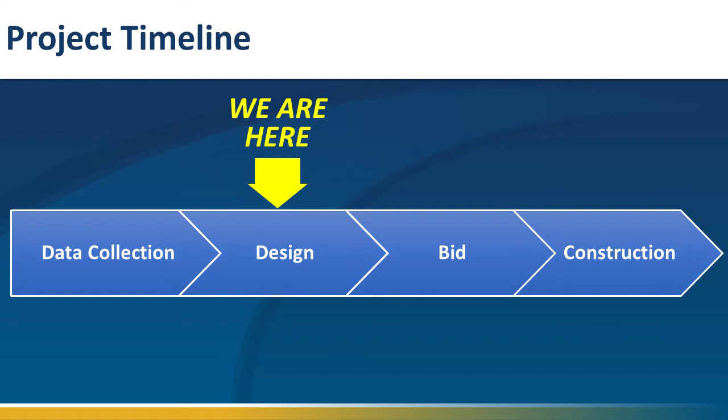Construction is anticipated to begin in March 2021 and is anticipated to be complete in June 2023. Traffic control plans will be developed to protect traffic and mitigate the impact during the construction period. There may be short-term, temporary delays and congestion, but every effort will be made to reduce delays during construction.

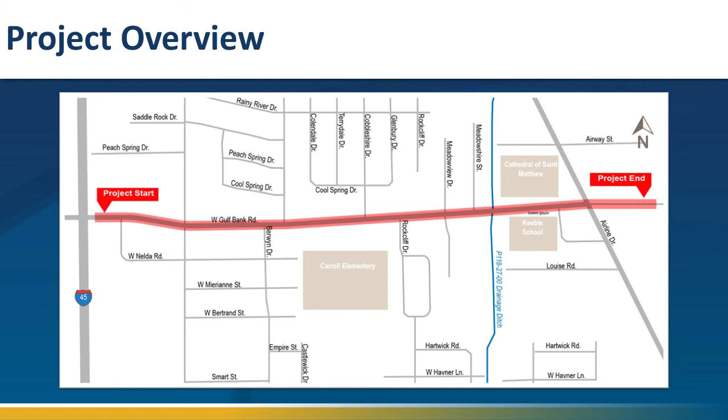West Gulf Bank Road is classified as a major thoroughfare with 4 lanes in the City of Houston's Major Thoroughfare and Freeway Plan. However, it currently exists as an undivided 2-lane asphalt road that does not have sufficient capacity to serve travel demand. The roadway currently does not provide pedestrian or bike facilities, and residents are forced to walk along the existing drainage ditches or in the roadway.

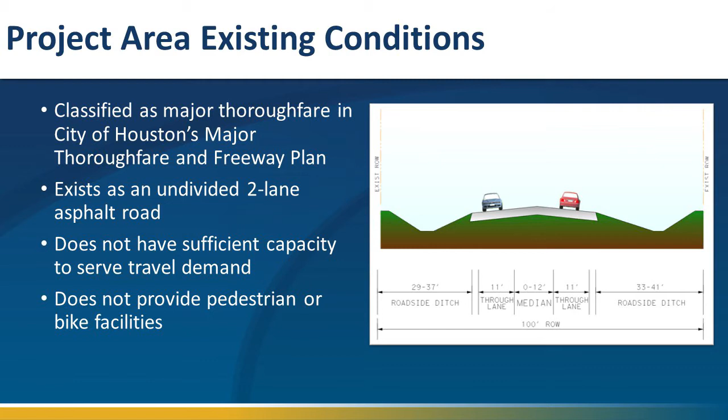In response to public concerns regarding increased traffic congestion and inadequate pedestrian facilities in the area, the Harris County Engineering Department is proposing these improvements to achieve a level of service to meet current and future traffic volumes, reduce delays, provide safe mobility for pedestrians and bicyclists, and reduce structural flooding of residences and businesses within the project area.

Another goal of the proposed project is to support the revitalization of the underserved communities surrounding West Gulf Bank Road by providing new public infrastructure, access to affordable and comfortable modes of transportation, and safe access to schools, churches, and businesses. By providing new public infrastructure, access to affordable and comfortable modes of transportation, and safe access to community facilities, the proposed project supports the revitalization of the communities along West Gulf Bank Road.

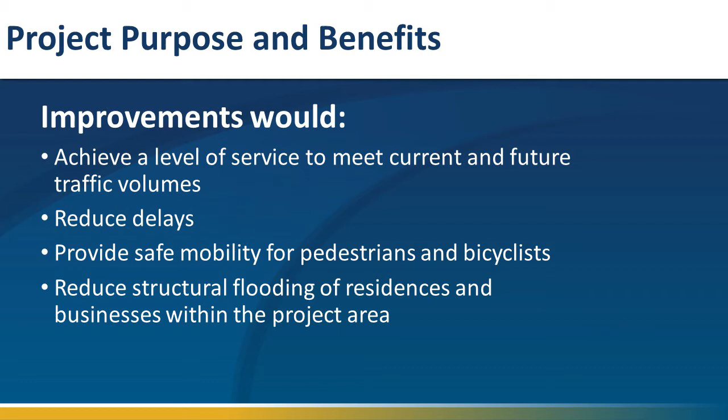The proposed improvements consist of reconstructing West Gulf Bank Road from a 2-lane undivided roadway to a 4-lane divided boulevard, with modernized traffic signals at Sweetwater Lane and Airline Drive and a new signalized intersection at Cobbleshire Drive. A closed drainage system with underground storm sewers will replace the existing roadside ditches.

An additional lane in each direction will increase traffic capacity on West Gulf Bank Road and provide stable flow of vehicles during peak hour traffic. Vehicles would also be able to more efficiently access Interstate Highway 45, which is both a designated evacuation route and freight corridor. The addition of medians, strategic median openings, and exclusive turning lanes will reduce traffic congestion on West Gulf Bank Road.

The Texas Department of Transportation previously acquired the necessary right-of-way to construct the proposed improvements. However, small strips of right-of-way will still need to be acquired at several intersections to achieve adequate and safe sight distances.

Construction costs for the proposed improvements are estimated to be $14.2 million.

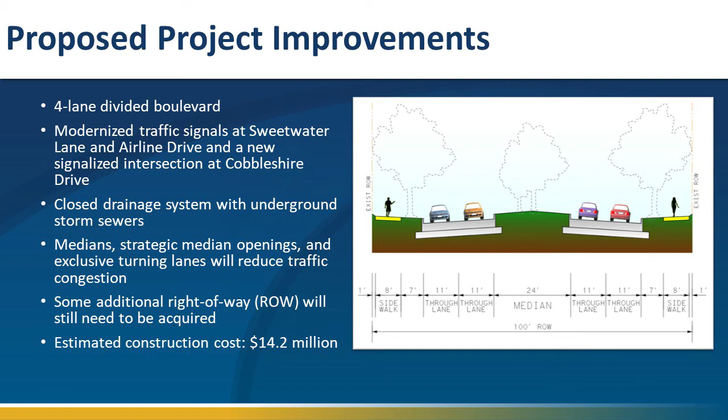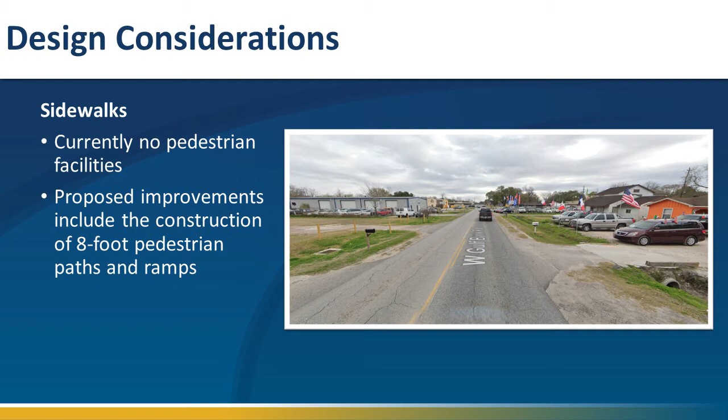The Harris County Engineering Department considered several factors when developing designs and upgrades to provide equitable access for road users, including bicyclists and pedestrians. These considerations included sidewalks. As West Gulf Bank Road currently provides no pedestrian or bike facilities, proposed improvements also include the construction of 8-foot sidewalks and ramps along each side of the corridor to limit conflict points and provide safe access to schools, churches, parks, and businesses in the project area.

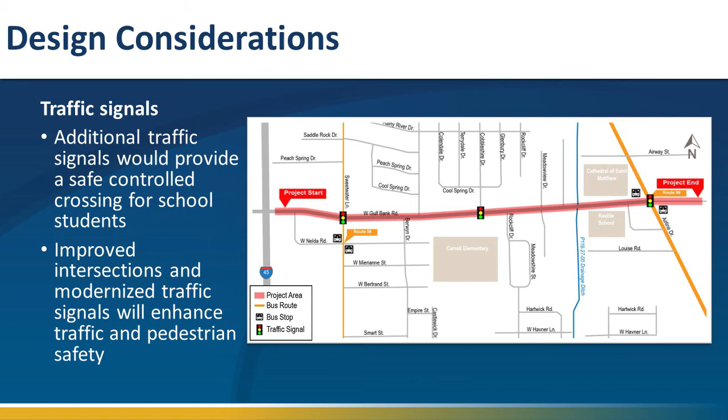Traffic signals: due to the spacing between existing signals at the intersection of Sweetwater Lane to the west and Airline Drive to the east, traffic signal installation is warranted at the intersection of West Gulf Bank Road at Cobbleshire Drive. A traffic signal at this location would provide a safe, controlled crossing for students that live on the north side of West Gulf Bank Road. Improved intersections and modernized traffic signals at Sweetwater Lane and Airline Drive will also enhance traffic and pedestrian safety.

Drainage: using recently updated rainfall data and probabilities, a hydrology and hydraulics impact analysis was completed to determine the required drainage system to mitigate the increases in stormwater runoff. The proposed drainage improvements will include a system of underground box sewers and minor regrading along channel P118-27-00 east of Meadowshire. The underground storm system will replace the existing shallow roadside ditches to provide drainage conveyance and detention.

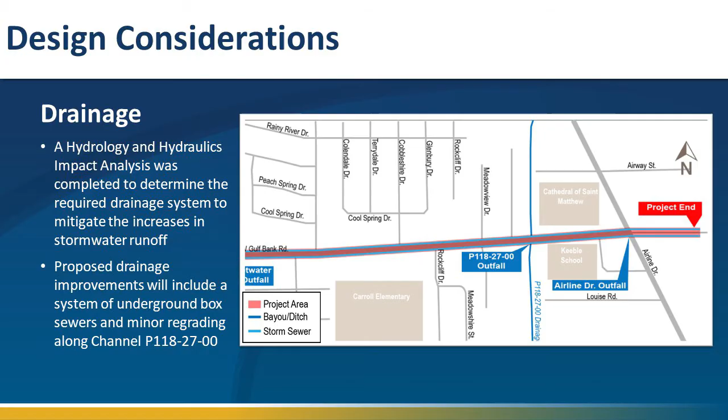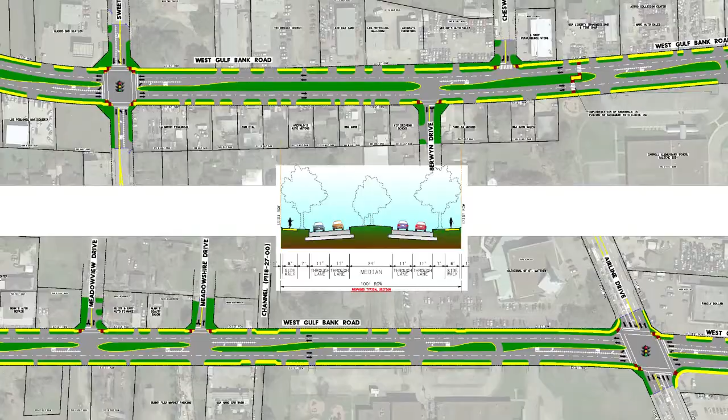We are now looking at an overall layout of the project. This document is available for download as a PDF from the Harris County Precinct 1 website. It is not final and is subject to change.

Let's take a quick look at the legend to understand what each symbol represents. The dashed line represents the existing right-of-way, which is the boundary that separates private property from public property. The solid line delineates between the various lots. The gray shape represents all proposed roadway and driveway pavement. The yellow shape represents the proposed 8-foot sidewalk, and the green shape represents grassy areas. We also have existing and proposed traffic flow arrows, and a traffic signal head symbol that represents an intersection that will be signalized.

Beginning on the west end of the project, the proposed pavement will tie into the existing lane configuration at the Interstate Highway 45 frontage road, which includes 3 westbound lanes and 2 eastbound lanes. As we move eastward, the proposed pavement will taper down to the proposed 4-lane road divided by a 24-foot median.

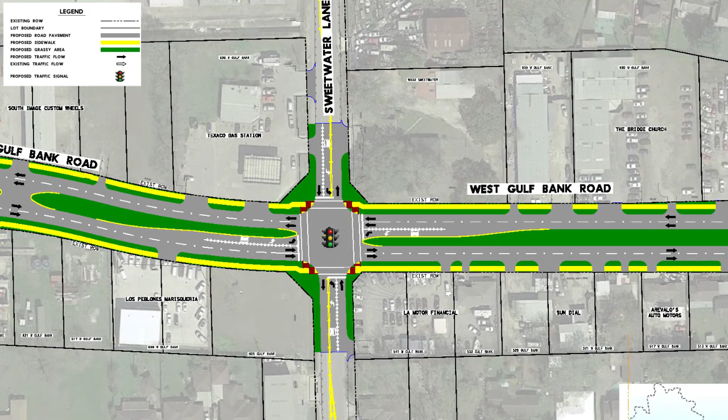At Sweetwater Lane, the existing traffic signal will be replaced to accommodate the wider roadway, and protected left turn lanes will be provided at each approach of the intersection. The 8-foot sidewalk will span the entirety of the project, and the ADA-compliant pedestrian ramps will guide sidewalk users across all public roadways along painted crosswalks.

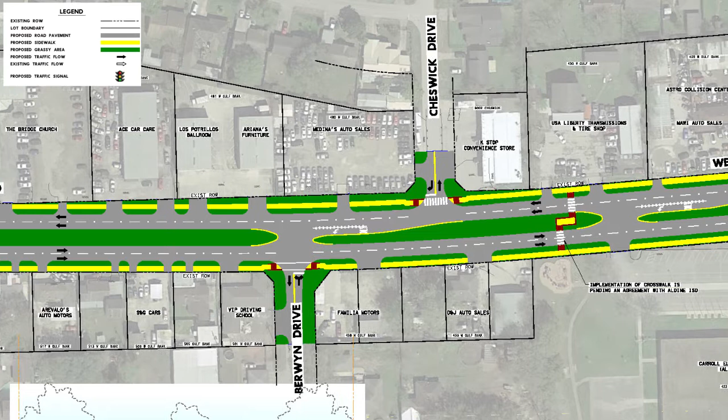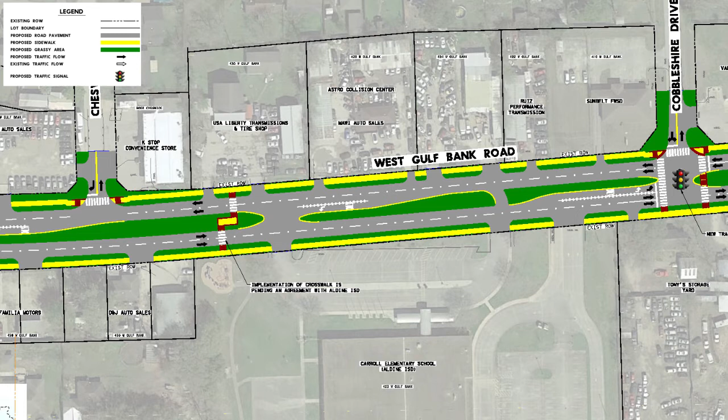As we approach Carroll Elementary School on the south side of the road, new speed zone flashing beacons will reduce the speed limit to an appropriate level during pickup and drop-off periods. A staggered mid-block crossing with a pedestrian refuge in the median is also being tentatively proposed for pedestrian access to the school. The implementation of the crosswalk is contingent on an agreement between Harris County and the Aldine Independent School District.

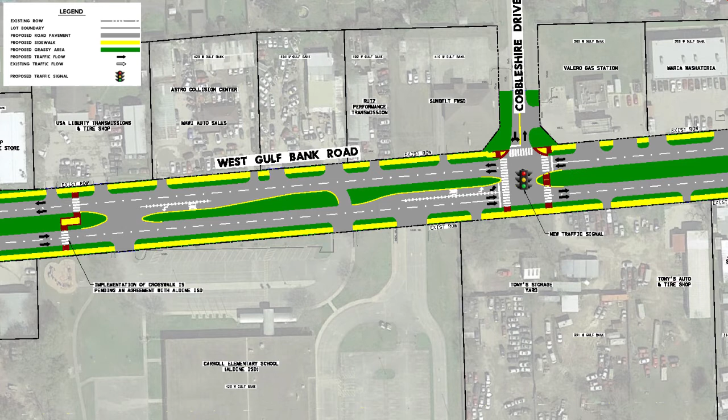Immediately east of Carroll Elementary School, West Gulf Bank's intersection with Cobbleshire will become signalized and will offer students and parents safe, controlled access across West Gulf Bank Road. As we continue panning eastward, you will notice that the majority of side streets will be across median openings with exclusive left turn lanes. The 24-foot median will also provide the ability for U-turn movements.

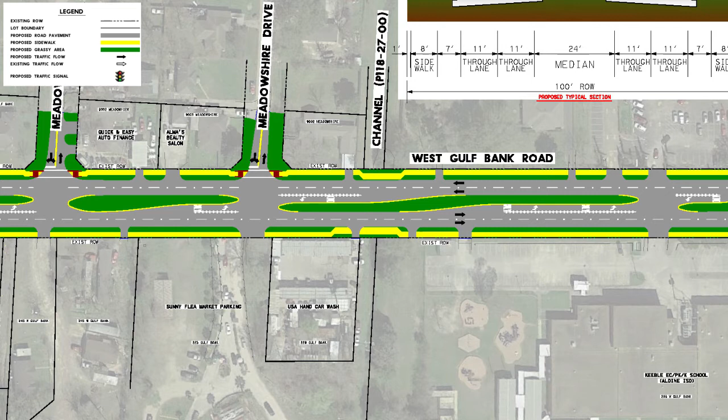At flood control channel P118-27-00 east of Meadowshire Drive, the existing dual 60-inch pipes will be replaced by dual 10x8 concrete box culverts. The underground storm sewer that will replace the existing roadside ditches is designed to convey stormwater to these box culverts. These box culverts are also being designed to complement the Flood Control District's future bond improvement project along the channel.

As we now approach Keeble Primary School, speed zone flashing beacons will also be provided here to reduce the speed limit during pickup and drop-off hours.

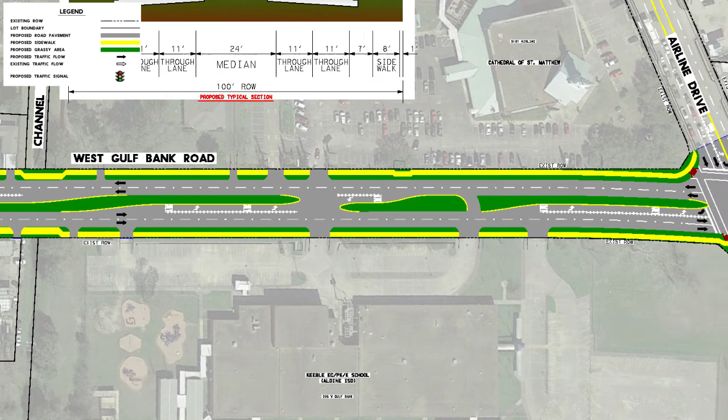The existing span wire traffic signals at Airline will be replaced by modernized mast arm traffic signals with crosswalks in all 4 directions. 250-foot-long protected left turn lanes at each approach along West Gulf Bank will maximize vehicular storage at the intersection and help prevent delays during hours of heavy traffic.

East of the Airline Drive intersection, traffic will be safely transitioned from the proposed 4-lane concrete road to the existing undivided 2-lane asphalt road. Any future improvements further east along West Gulf Bank Road will be able to seamlessly tie into the improvements being proposed by this project.